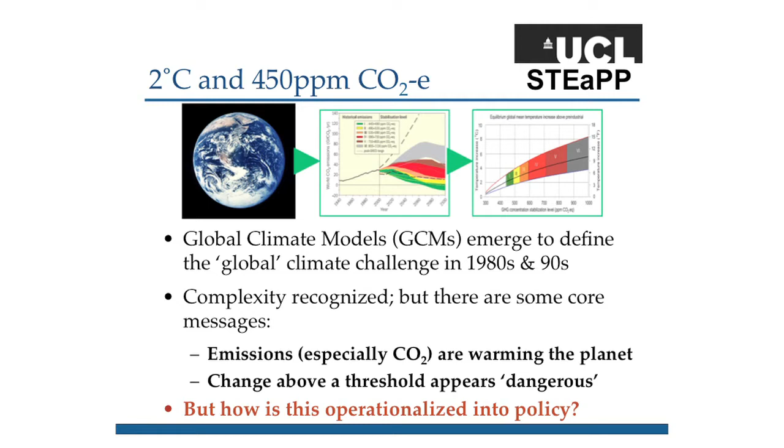Two degrees Celsius and 450 ppm. Where did these come from? These numbers came from generations of scenarios using climate models. GCMs emerged in the 1980s and 90s, really coming to prominence as they began being able to replicate the 20th century in and around the late 80s and early 90s.

If CO2 is the problem, if a warming planet is the problem, and you can identify a single culprit like CO2, you can create a market around it. If you can create a market around it, you can create a global deal on what that market would look like. That has been the underlying rationale of climate politics for the last two decades, trying to seek a mitigation agreement, a global mitigation agreement that would lead to some form of binding targets and a way of pricing in the externality of climate change by simplifying everything down into a carbon equivalence and dollars.

Essentially, to summarize, the focus has been on carbon and carbon mitigation for some good reasons, and there have been a range of scientific and technical metrics used in order to digest everything down into these numbers of 450 ppm and 2 degrees centigrade.

Shale gas in particular, in the last few years, has really begun to change the equations around not only the energy scenarios going forward, but also the carbon calculations. The impacts of all of these new oil sources, these new carbon sources that have been discovered, are incredibly significant.

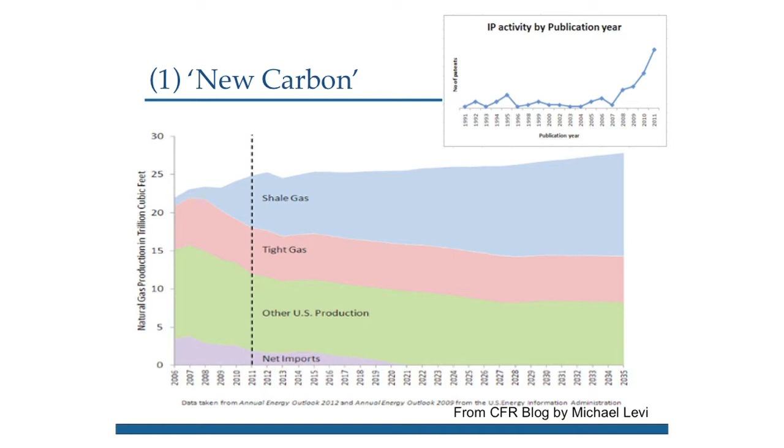This is just one of the projections on how shale gas is going to be displacing other sources of gas production in the US. And of course, we're discovering just last week the British Geological Survey released a new report talking about much greater shale gas resources in the UK than had been previously estimated.

So when you think about the politics of it, world leaders get to show up in 2015 and say, we will reduce 20, 30%, whatever it is, by 2025. It's a nice near-term political win. It has all of the political connotations that one wants for a climate deal, but it comes with a big challenge.

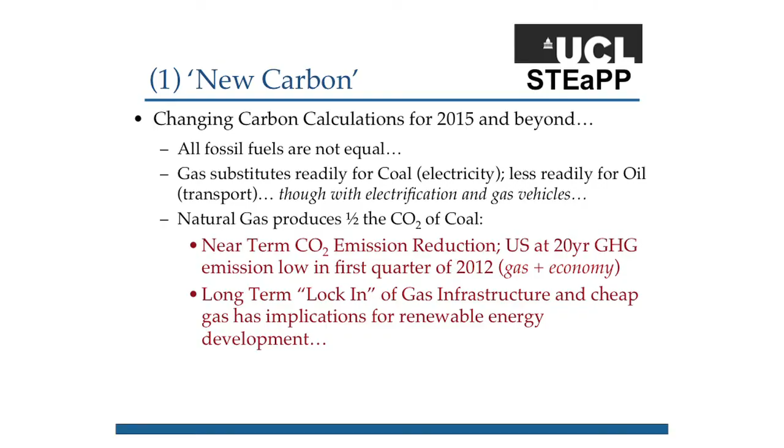We as a society entirely rely on electricity, and that must be maintained in the future, whatever we'll do. What are the drivers for change in the 21st century?

So first, let's talk about generation. From the power system point of view, what we are talking about is replacing those big traditional power stations, all thermal power stations, with smaller and uncontrollable, because you cannot tell wind when to blow, stochastic power sources.

Stochastic because you don't really know what it will be doing tomorrow. You can guess it within 10% at the most. So that means there's a number of challenges.

The first is the balancing challenge - how to balance the wind when it doesn't blow. It's an economic challenge: how to do it in the most cost-effective way, but we know how to do it. It's also about control, how to optimize the whole thing. But it's not really a big technical challenge, it's just to get it right, as cheap as possible.

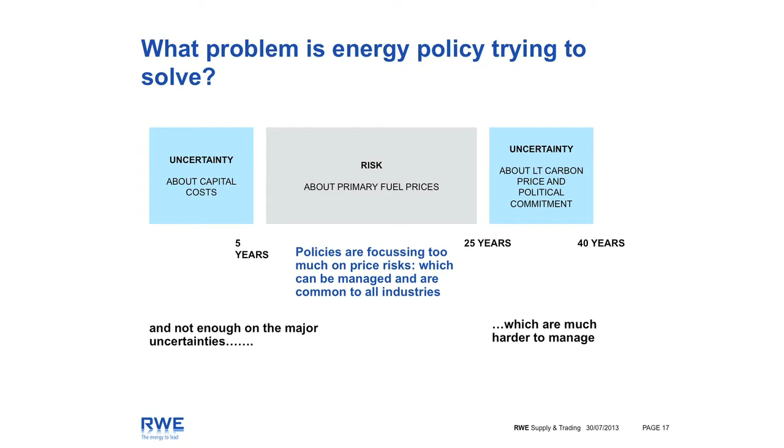The thing I think makes the energy sector a bit special is the uncertainty elements. Particularly in terms of the first five years, how much is it actually going to cost to build a nuclear power station? The current direction of policy is to try, it seems to me, to take a lot of the risk out of the investment decision. But my question, and it's an open question really, is: does this focus on bankability...

And really we're talking about bankability in terms of debt finance of investments. Does that actually discourage other potential investors? Are you actually chopping off a big chunk of the global wealth pool when you're looking at who is going to invest in these things? So that's one set of questions I think we have.

And the second is a bit about customers. So the two Ronnies, that's Ronnie Corbett and Ronnie Barker, and John Cleese did this famous sketch in the 1960s about what it meant to be upper class, middle class and lower class.

If you think about how you're distributing risks between those various classes, you have to be pretty careful about that, because anyone who's an electricity consumer in the UK is going to be a de facto equity participant in any of the CFD plant that gets built. So when the power price is high, you will get paid a dividend, and when the power price is low, you'll be asked for some more funding for that particular business. So you've turned into an investor in a particular type of asset.

What kind of energy markets do we want? There's a pretty wide choice. At present, we are trading in commodity type traded markets at the moment, and that's what we, as an energy trading business, know and recognise.

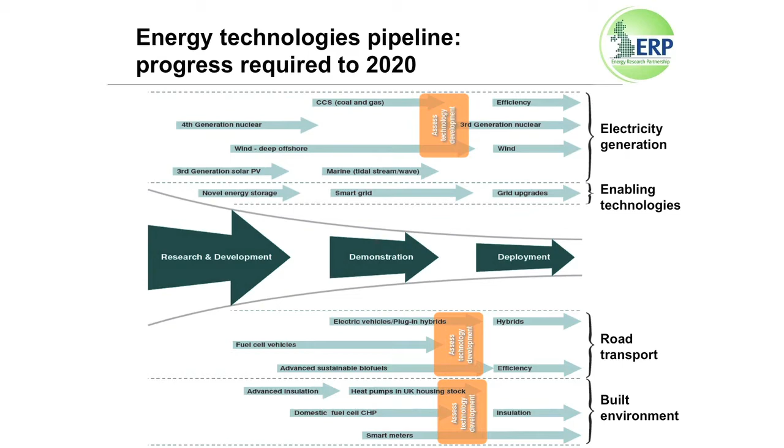This was just showing the sort of pipeline that would be needed if we were to meet longer term targets. This was the sort of progress that was needed to be taken by 2020 in terms of progressing different sets of technologies through the innovation process, from research out through to deployment.

They have their limitations in terms of the different time steps that are used, the different technology sets that can be put into the models, and the inputs and assumptions that go into those. So there are limitations there when you're dealing with a really numeric model.

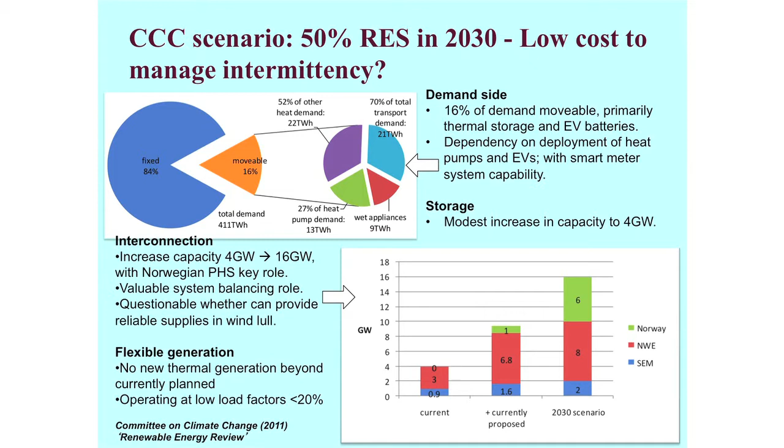This was the Committee on Climate Change scenario, looking at 2030 and 50% renewables, and some of the options of doing that through different flexibility options. But it's not about taking just those blank outputs. It's about thinking what does that mean, what are we going to have to do because of that, rather than just implementing policy. It's about how we take that analysis and translate it into policy, which I think is becoming more accepted now.

It's also beginning to influence the innovation agenda. I think it's questionable how energy system scenarios have influenced energy policy historically, if you look back at the Royal Commission's work and since then, and even more so how it's influenced energy innovation policy.

The World Energy Council is a membership organization based in London. We have about 3,000 members in our network in 95 countries, so a very broad representation.

The idea, when we do scenarios, is to deal with this issue of uncertainty. As we move on, this scenario funnel widens. For us, it was very important that we wanted our scenarios to be exploratory rather than normative.

In the first scenario, we assume that the world is market facilitated, driven by consumers, with the focus on achieving growth through low-cost energy. On the other hand, we have a government-led scenario that is more voter-driven, where the focus is on national energy security, and national and regional measures to increase the share of renewables in the energy mix.

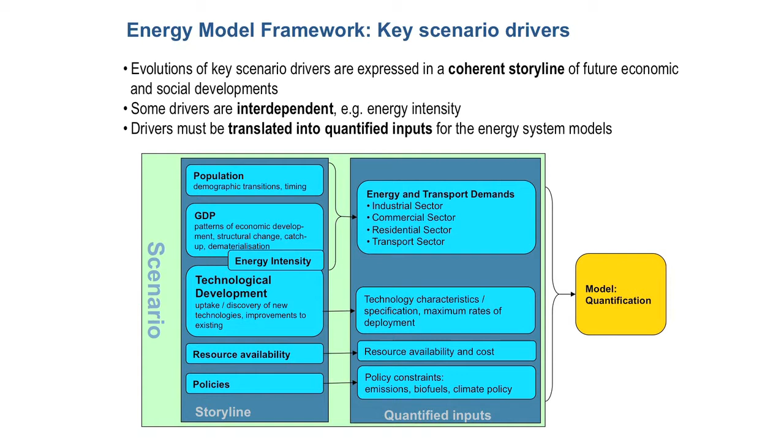So what you see here is how we did the modeling work. We looked at population as a key driver, GDP growth, technologies, resources, and different policies. We then quantified those using a linear programming optimization model.

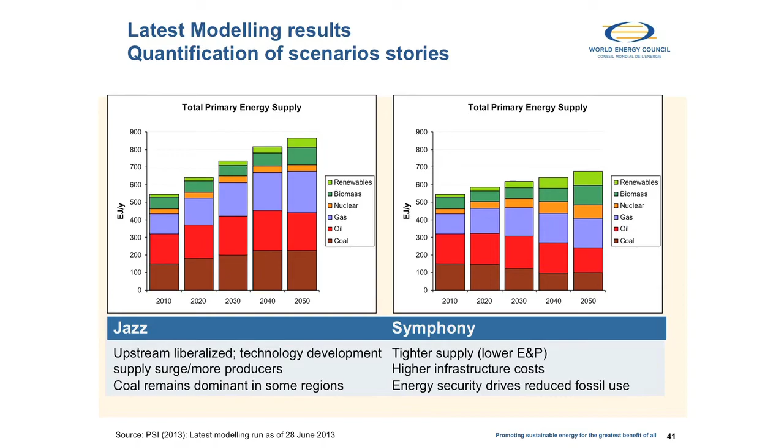What we see here is the development of total primary energy supply over time up to 2050 - the composition, if we look at renewables, biomass, nuclear, gas, oil, and coal. We can see on the left-hand side that coal really is there to stay, and that's one of the key messages, especially if we look at energy demand in India, China, and maybe Africa as well. Coal has a role to play.

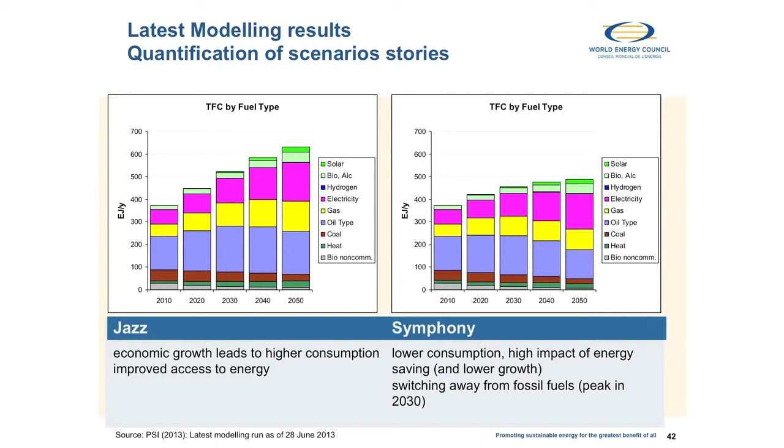In Symphony, we would expect a more stable and quicker transition to renewables, and especially more hydro in emerging countries, particularly in Africa and Latin America.

We have made different assumptions with regard to CCS, and clearly that's one of them. There might be others, such as energy storage, and this is what we call in scenario terms wildcards. You can clearly see the difference in the assumptions with regard to CCS in Jazz and Symphony.

In the Jazz scenario, we assume that CCS will be ready at a commercial scale probably around 2035, but it is not adopted initially due to high cost and the relatively low carbon price. We assume CCS can be used commercially in enhanced oil recovery, and it will be adopted more widely after 2040 probably. In the Symphony scenario, the picture is quite different.

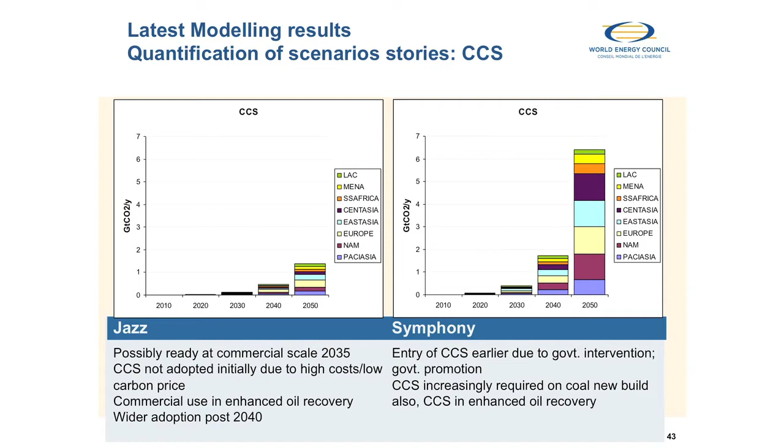You will see a much higher take-up of CCS due to government intervention and promotion of these technologies. One assumption we have made is that CCS is increasingly required on new coal build, and it will also be used in enhanced oil recovery.

Doing global scenarios is a very challenging task, and there are a lot of limitations that go into the model as assumptions. But at the same time, I think it's important to start somewhere and to quantify these trends in order to substantiate the debate.

We review the latest studies based on global energy scenarios and analyze the main differences between them. This graph shows the scenarios suggested by these 6 studies for future global projections from 2020 to 2050. All these scenarios show that for 2020, the projections are closer to the present time.

The 6DS, for example, from ETP is ranked first and has the highest CO2 emissions. In 2050, the 6DS projects the largest amount of CO2 emission. The World Energy Council Symphony and GEA Efficiency and Supply have similar projections. The Greenpeace reference continues to preserve its high scores in emissions, based mainly on current policies.

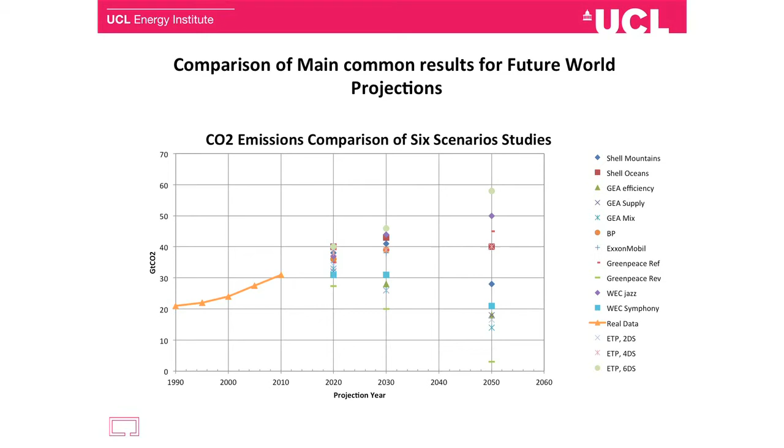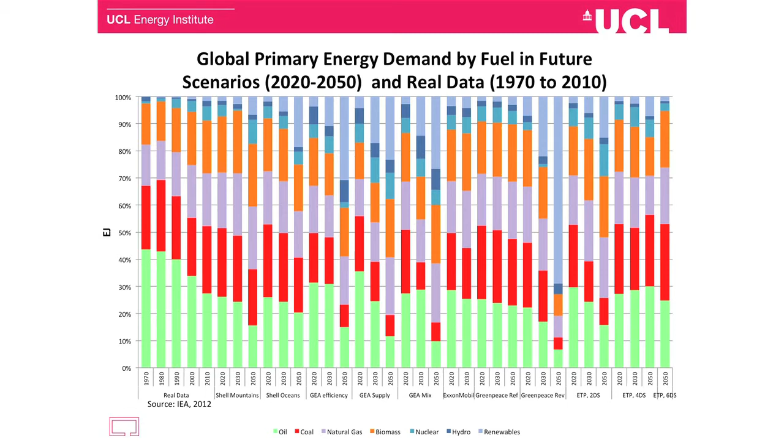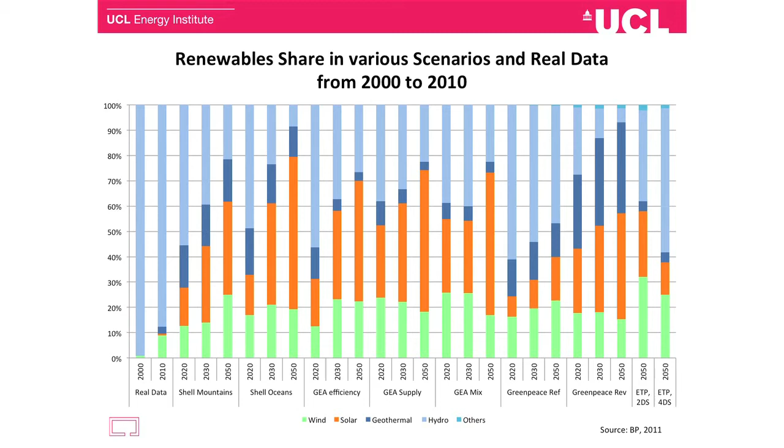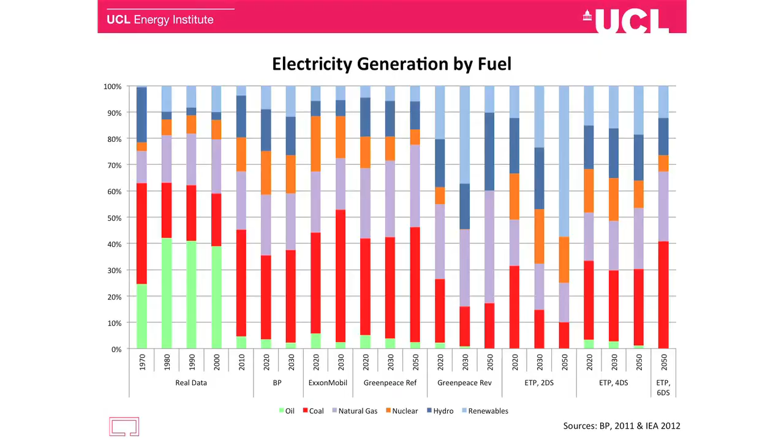We break down the renewable resources in the world energy system by 2050. We observe that in most scenarios - Shell, GEA, Greenpeace Revolution - solar power has the main role in global energy production from renewables. Hydro also continues to play an important role in electricity generation.

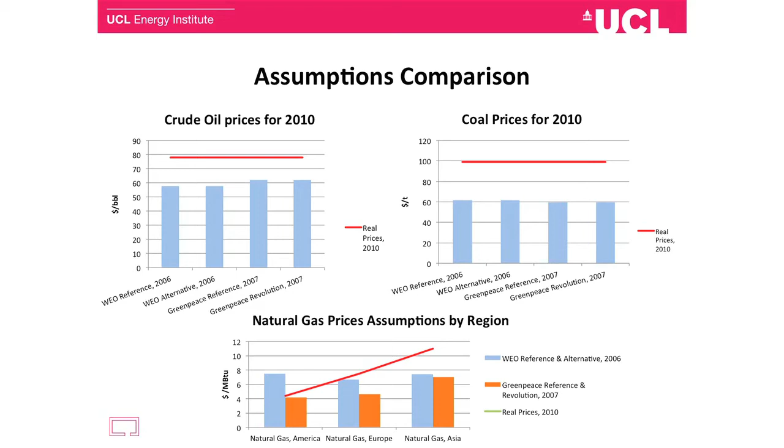We compare their main assumptions: world population, GDP and fuel prices. The energy projections in all reports are highly sensitive to underlying assumptions about GDP growth. We look at fuel prices for coal and oil - these were projected to be lower than the real data in 2010.

Overall, we assessed, or are in the process of assessing, 19 different studies with horizons between 2010 and 2050. The particular three we picked that were completed in 2006 are the ILEX study for WWF, the DTI study for the UK government, and a Friends of the Earth study. The ILEX study and the Friends of the Earth study both look at producing an energy system, or electricity system in particular, with no nuclear capacity at all from 2006.

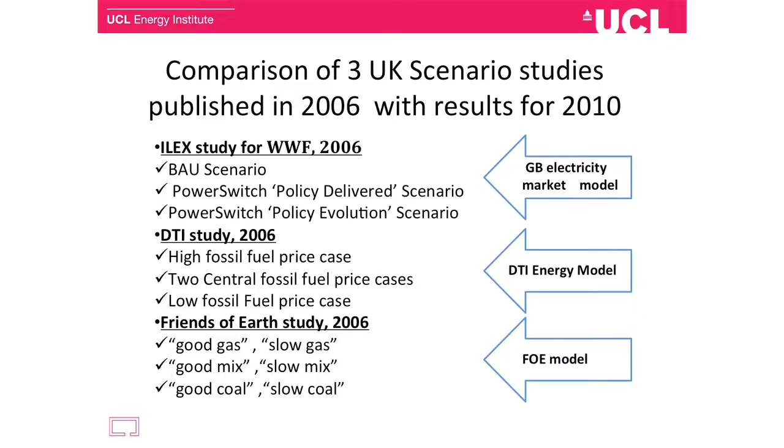The ILEX study has a business as usual scenario and a power switch policy delivered and power switch policy evolution. Policy delivered looks at delivering current policy as was in 2006, and policy evolution looks at additional policies to be introduced. So we can see the fuel price comparison on the presentation on the left.

You can see the gas and coal prices - these are exogenous assumptions that were put into the model as inputs. Electricity demand growth - you can see there's obviously a massive variation in what was assumed to be growth in electricity demand between 2006 and 2010. It's a large variation, but there's some consistency in assumptions.

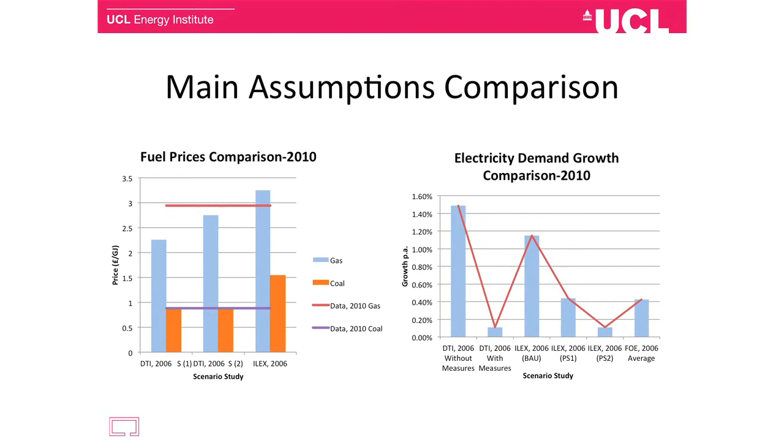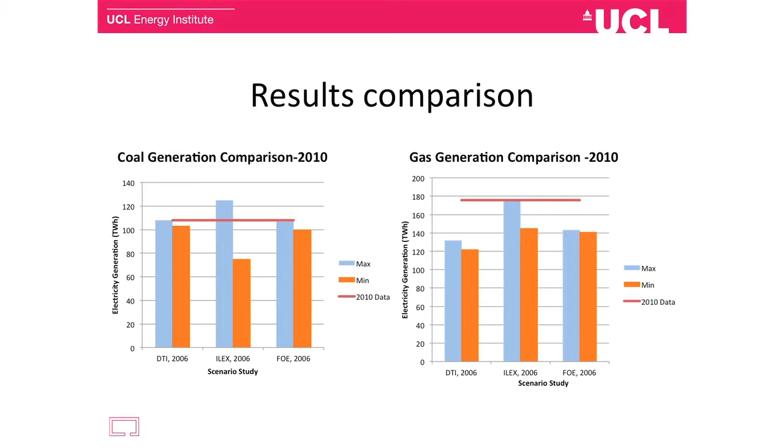If you look at the DTI 2006 with measures compared to the ILEX PS2, which is the equivalent of the ILEX with measures, here we go to the results. This is coal and gas generation. We can see on the left, DTI and FOE's maximum assessment of their coal generation in 2010 is roughly what happened, whereas the ILEX BAU case is much higher than what they assumed.

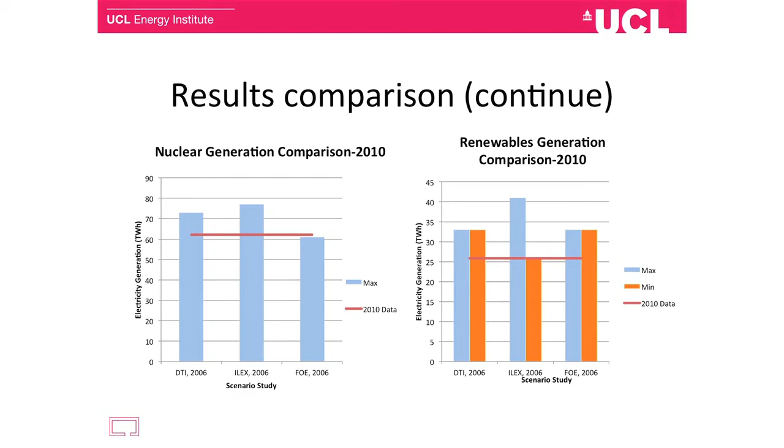Nuclear generation - considering that the FOE study and the DTI study both assumed no new nuclear capacity and were gradually drawing down their nuclear generation.

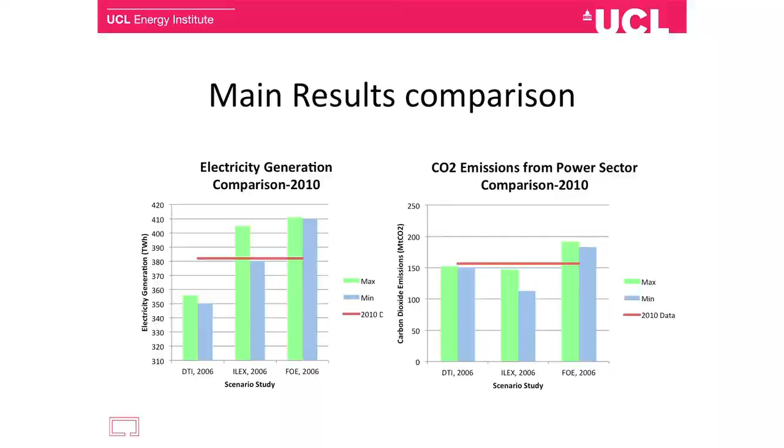CO2 emissions from the power sector - again, as there's only a 4-year difference between when they conducted the study and the 2010 horizon, you would think there should be a relatively equal estimation of emissions from the electricity sector, but there's quite a variation. Even the ILEX business as usual scenario predicted about 150 megatons of CO2, but the actual value exceeded that, even considering that between 2006 and 2010 there was a financial crash which reduced emissions across the board.

In this moment, the UK is currently in transition to become a net energy importer. We have various energy policies in the UK: the Energy White Paper, published in May 2007, the Low Carbon Transition Plan of July 2009, and the Energy Bill 2012 and 2013.

Part of the Energy White Paper policy mentions that we need 35 gigawatts of new electricity generation capacity over the next two decades, and the Energy Bill aims to close a number of coal and nuclear power stations over the next two decades. We have facts and opportunities: a fifth of Britain's power capacity is scheduled to close in the next decade.

Then we have this decline in North Sea oil and gas, so global markets are also more volatile and pricey. The government recently issued about 197 new licenses for oil and gas exploration, the largest number since 1964. Then recently we have the story of shale gas.

The exact potential is unknown. In terms of development opportunities, the government promised building 40 new gas power stations. So it's very, very difficult to do scenarios if we try to take into account politics.

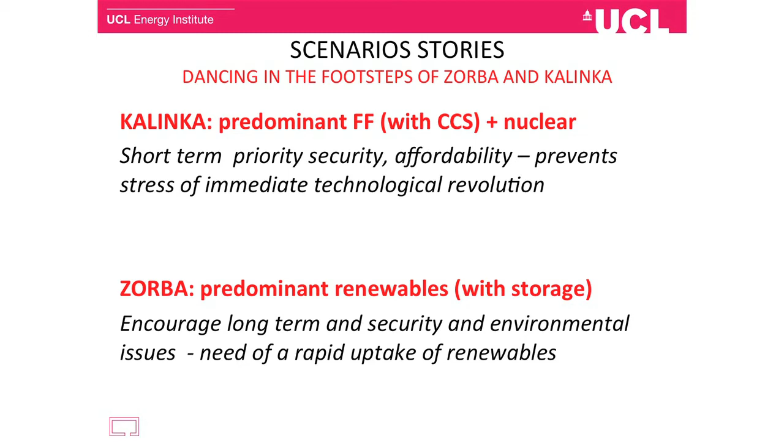Kalinka is predominantly fossil fuels with CCS and nuclear. That is a short-term priority: security, affordability, preventing stress of immediate technological revolution. The key drivers for this scenario story are recovering economic growth and meeting short-term demand, with well-known dispatchable technologies, but CCS is not well known yet, so there's limited carbon reduction in the short term.

Zorba is more predominantly renewables with storage. It encourages long-term security and addresses environmental issues, with a need for rapid uptake of renewables. The key drivers are achieving environmental goals, long-term economic growth with significant investments by 2030, and support from the government for development of low carbon technologies and high investment in energy storage.

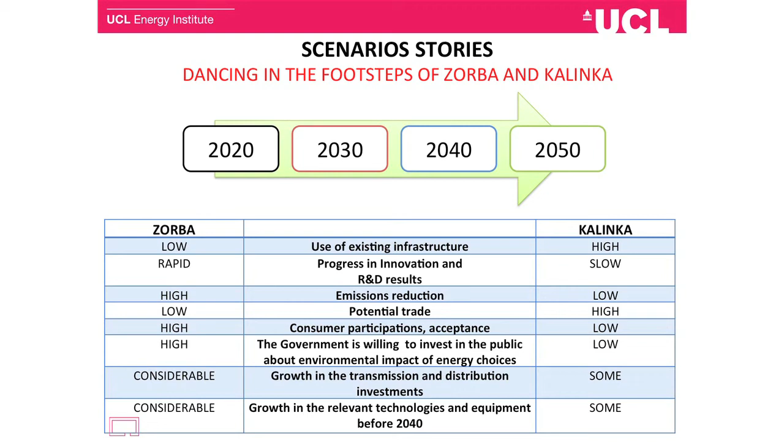The time horizon is from 2020 to 2050. I put 2020 in black - it's full of uncertainties, full of opportunities, but we don't really know what to do with them. 2030 is in red, mainly because policymakers will need to devise, implement, and commit to policy. Then 2040 is going to be blue, like the sky. Then by 2050 it's green, so we become green together.

Within the triangle, policymakers need to ask several questions. What are the main needs of a country? What are the economic goals? What industry do we need to support over the next 20 years? Where are the investments needed? Which instruments will we choose to address these needs?

Kalinka is predominantly fossil fuels, with plans for nuclear and some shale gas - that's mainly the situation at this moment. Then by 2030, energy security has been reinforced with fossil fuels and nuclear capacity installed, along with a moderate but fast installation of renewables. So we are going to achieve a 45% reduction in CO2.

Then by 2040, we have an increased proportion of CCS, and storage technologies start to be established. So we are going to achieve a 60% reduction in CO2.

Zorba, we have the 2020 generation mix. Transmission is key, enabling connection and balancing of new, diverse sources of energy. Securing offshore wind is critical. By 2030, electricity demand will increase, driven by electrical cars and heat pumps.

Gas and oil demand will decline, and the distribution network capacity will significantly increase. Some nuclear capacity remains as a backup. By 2040, carbon capture and storage is deployed at a significant scale.

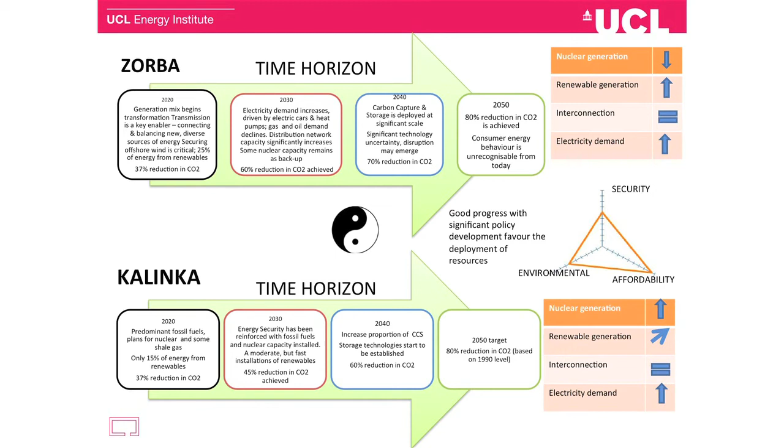We try to calibrate to different economic growth rates, projections of international commodity prices, and other assumptions such as cost and penetration of technologies.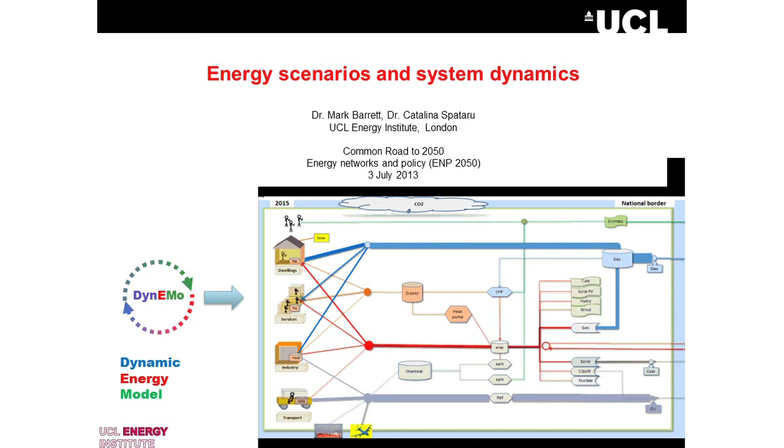This dynamic modelling is at the whole national energy system level, and this dynamic is important over periods of minutes and hours, but also across the seasons. So again, we have winter, spring, summer, autumn, with our demands co-varying with the weather.

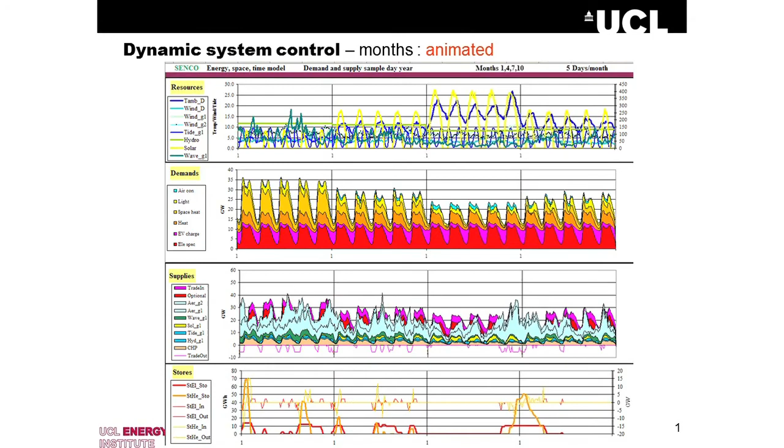We see here the space heat load decline. As we come into summer, we're getting some air conditioning coming in, shown in light blue, and so on. At the same time, our renewable supplies are fluctuating. These purple patches are where there's not enough renewable energy, so we're having to generate it ourselves or import it. To accomplish this dynamic system management, we have an aggregate heat store, in orange.

And an aggregate electricity store, in red. We have to control the whole system - it's all interconnected. There's no electricity bone unconnected to the rest of the body; all the parts are connected. We have to look in space and time.

So here's a mock-up animation of a kind of future UK system. Now we have these demand centres here, and the demand is varying hour by hour during the day.

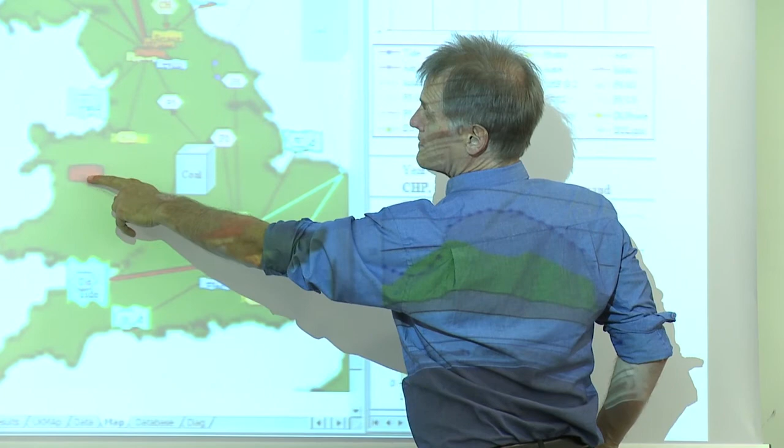That's the negative on this graph. And we have wind farms. We have a tidal scheme here. There's Dinorwig pump storage going up and down. We have wave power, hydro, and so on. And these things are varying, so the flows across the network are going to be fluctuating as well.

So we have to balance this in space and time. The conclusions are, well, we have to consider whole system dynamics from minutes to years, as driven by people, weather, and technologies. And then we need to optimize the configuration of the whole system and the control strategy at the same time. And so, of course, the work that Catalina and other colleagues and myself do is really critical.

To stakeholders, to try and design these systems and explore the benefits and risks of different configurations and pathways.